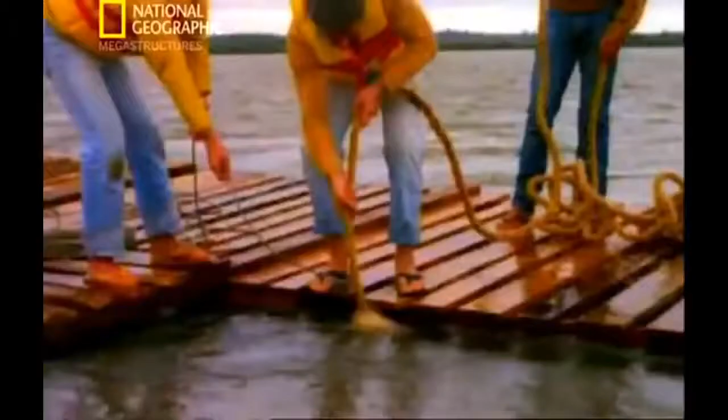The River Parana is the 7th largest in the world, holding 4 times as much water as America's Colorado River. At a spot called Itaipu, it flows through a deep underwater gorge. Geological surveys revealed that the bedrock was strong enough to bear the dam's enormous weight. Itaipu seemed perfect, but there was a huge obstacle.

The gorge sits right on the border between Brazil and its old enemy, Paraguay. In the 19th century, the two countries had fought in a bitter war. Paraguay lost half its territory and half its population was killed. Even over 100 years later, there was still mistrust between the two peoples.

1966, complex negotiations began between the two countries. For 7 years, the dam project hung in the balance. But in the end, the lure of vast supplies of energy proved irresistible. On the 26th of April 1973, Brazil and Paraguay signed a treaty. The Itaipu Dam got the green light.

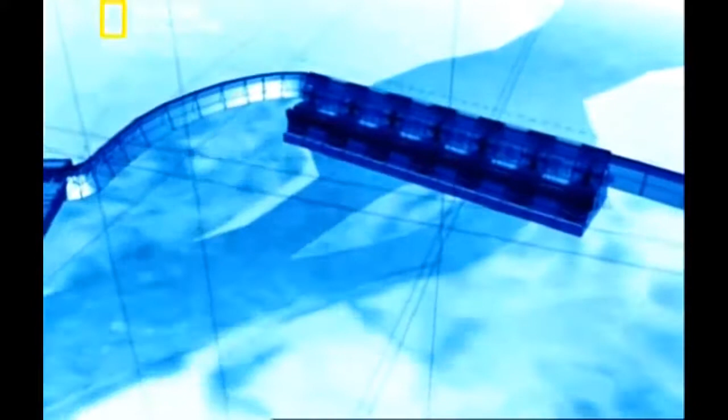Itaipu looked set to outstrip some of the world's greatest dam projects. It was destined to be 18 times as long as the mighty Hoover Dam, and 9 times as heavy. Most importantly, it would produce 6 times more electricity. But building the world's most powerful hydro dam meant making sacrifices. A vast area of farmland and forest would need to be flooded to feed the monster dam. Tens of thousands of people stood to lose their homes, and the habitats of thousands of animal species would disappear forever, as the Itaipu project reached the point of no return.

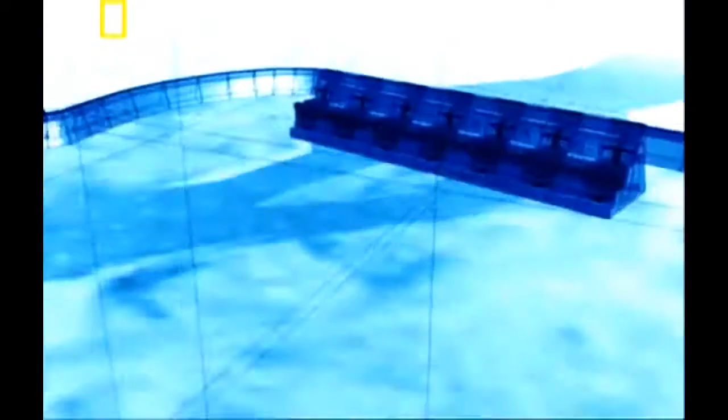May 1975. Old enemies Brazil and Paraguay signed an historic pact, which enabled construction to begin on the biggest hydro dam in the world. The aim, to harness the power of the mighty Parana River. The goal, an energy bonanza for both countries. The multi-billion-pound budget was jointly funded by the Brazilian government and by foreign investors.

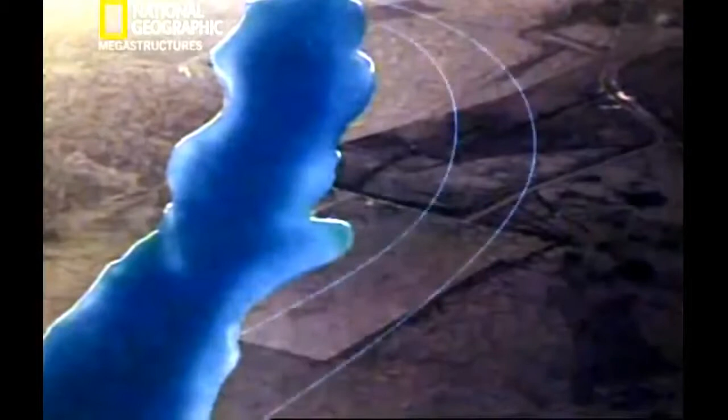Engineers found a site on the river that seemed perfect for the dam. But to build it, they would first need to divert the Parana from the course it had flowed for thousands of years and reroute it. A massive diversion channel had to be carved through the rock of the riverbank to temporarily divert the river away from the dam construction site. At 2 kilometers long and 80 meters deep, it was the biggest diversion channel ever attempted. If it failed to divert the river correctly, the whole project would be doomed.

Piero Sambinelli was the engineer in charge of building the channel. It was a mighty struggle that we fought. The Paraná was the most difficult diversion ever tried.

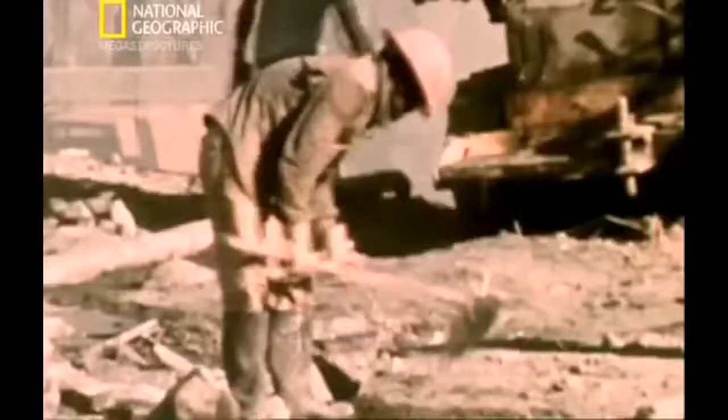Second of May, 1975. Building the Itaipu Dam began. First job, to dig the channel diverting the river. It took 3 years of explosives, mechanical diggers, and sheer brute force to slice through the rock. The dig threw up a mounting pile of waste rock known as spoil. As the months passed, the unwanted earth and rock reached the size of Rio's famous Sugarloaf Mountain.

Meanwhile, others were counting the environmental cost of such a big dam. Once complete, the Itaipu Dam would turn the Parana River Valley into a giant reservoir, flooding an area twice the size of the American city of Chicago to a depth of 100 meters.

One reason this valley has been chosen was because of its sparse population. But there was still 600 square kilometers of agricultural land and thousands of small farms on the Brazilian side, and on the Paraguayan bank, 470 square kilometers of rainforest, home to thousands of wild animal species. The thirst for energy comes at a price.

As the dig got underway, environmental consultants were drafted in, their task to assess the wild animals and plants saved from the coming flood. It was the first dam project to attempt a major rescue plan, but at this stage there were only 17 people involved, mostly volunteers. Brazilian Fernão Carbonar was one of the team.

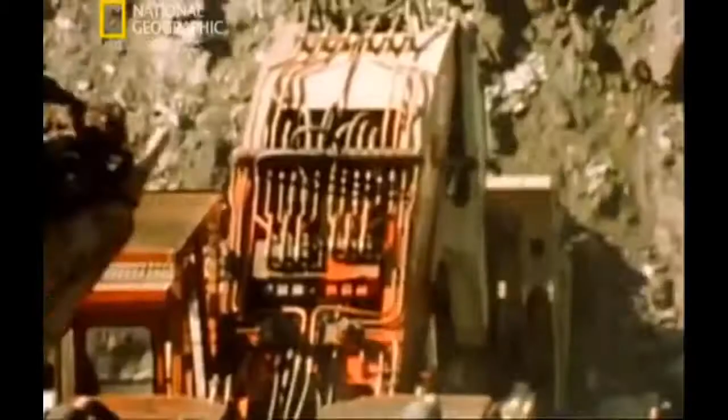Alberto Fres valued hundreds of homes. The houses were measured, described, and photographed one by one. And all belongings, even if it was just a stool, it was photographed. While the valuation process was seeming to take forever, the digging of the diversion channel was right on schedule.

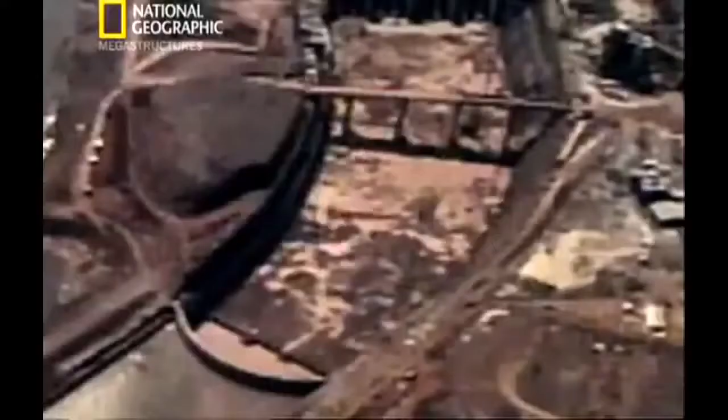3 years after digging began, engineers were now set to demolish the channel's concrete seals and send the Great Parana River pouring down the channel. 8 a.m. on October the 20th, 1978. Dynamite charges are set at each end of the channel. It's a tense moment. If the explosion damages the channel, it could set the project back years.

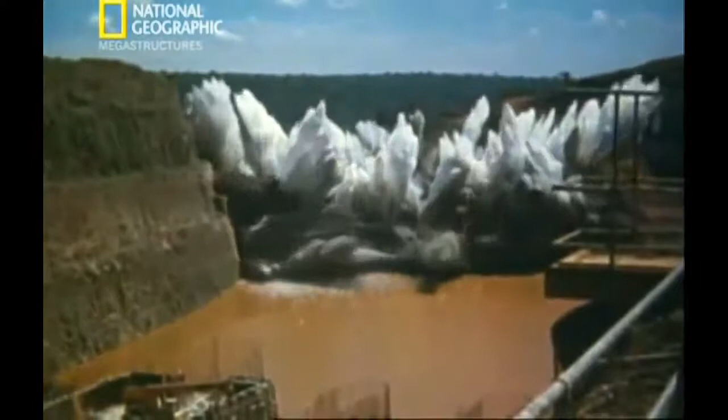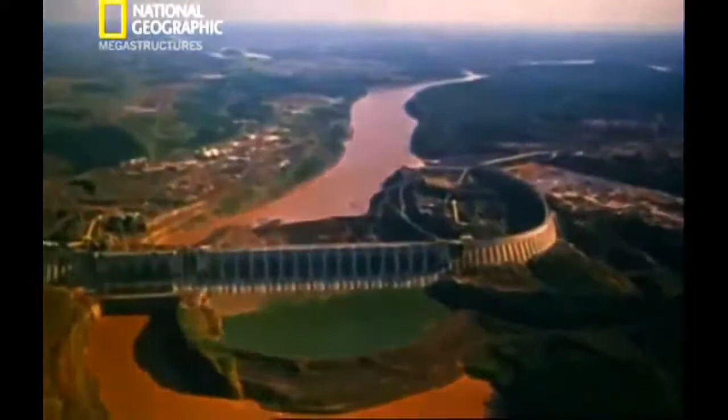It was a fantastic moment, incredible moment. The blast was like a firework. The mighty Parana is thundering down its new course. It's a momentous achievement. The Itaipu engineers have altered the path of one of South America's biggest rivers. But this was only phase 1 of the diversion. Some water still flowed down the old riverbed.

So huge temporary dams called cofferdams were built to force all the water down the diversion channel, away from the dam construction site. They were made by dumping huge pieces of rock into the river until the flow was stopped. The cofferdams might only be temporary, but British engineer Bill Beath knows how secure they had to be. Cofferdams prevent the river from flowing into the area where the dam is being built. Should these collapse during construction, it would be a total disaster.

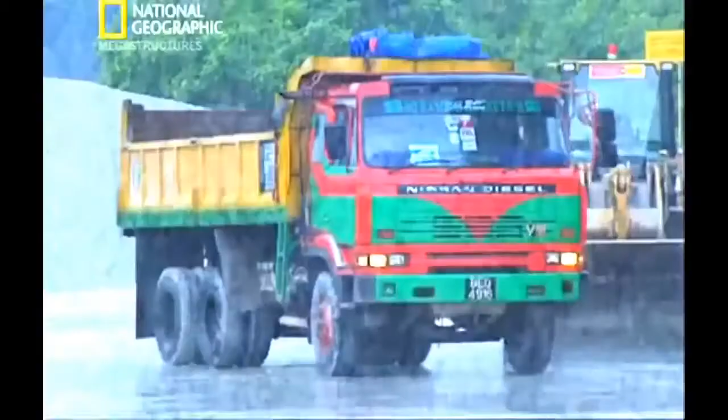Brazil has some of the most torrential rainfall in the world, and rising water could put the cofferdams under pressure or even burst the walls. That would bring a devastating wall of water down on hundreds of workers. The engineers hoped that they would have enough warning of rising river levels to safely evacuate workers. Until the main dam walls were built, all that stood between the workers and the threat of flood was a wall of rubble.

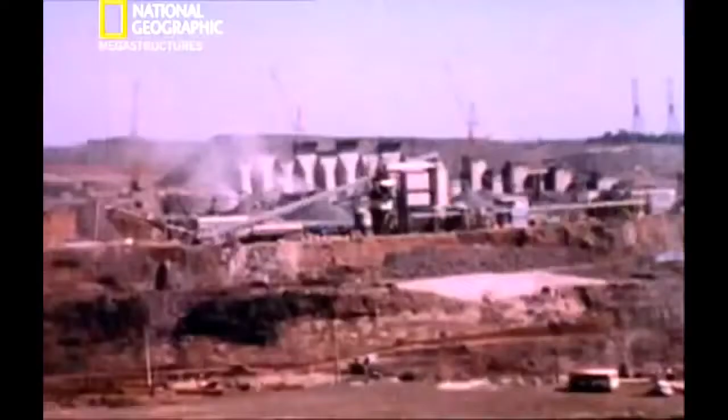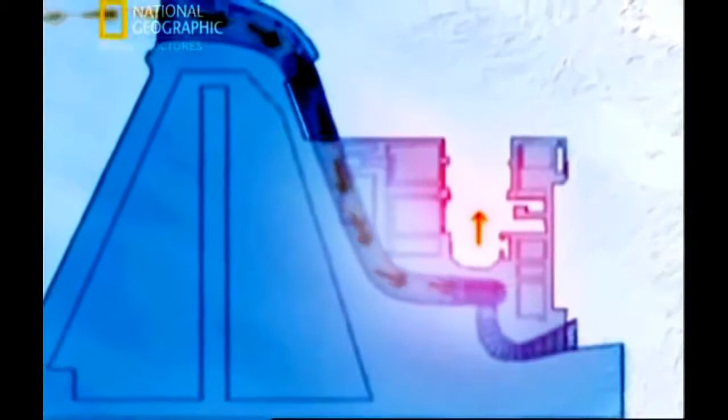With the River Parana now fully diverted, the biggest job of all, building the huge walls of the Itaipu Dam, finally began. But there was a problem. A hydroelectric dam works by dropping water onto turbines, making them turn at great speed to create electricity. The taller the dam, the greater the drop, and the more power is produced. Itaipu's engineers knew that the water in the dam must fall a full 100 meters to produce the promised record-breaking amounts of power. Yet, the riverbed is only 50 meters deep.

The solution? Build a series of secondary dams. These raised the height of the concrete central dam to make it tall enough to do the job. But it meant running the dam structure right across the valley for 7 kilometers. Autumn 1975. Work began on the secondary dams.

Meanwhile, the valuation of the houses, farms and land in the river valley which the dam will flood has also been completed. Brazilian and Paraguayan authorities have learned that before they submerge the area under 100 meters of water, they must buy up 8,500 homes and farms. The cost? £250 million in today's money. That's on top of the multi-billion-pound price tag for the dam itself. Offers of compensation were rushed out. Most were accepted, but a handful of people did mount legal challenges.

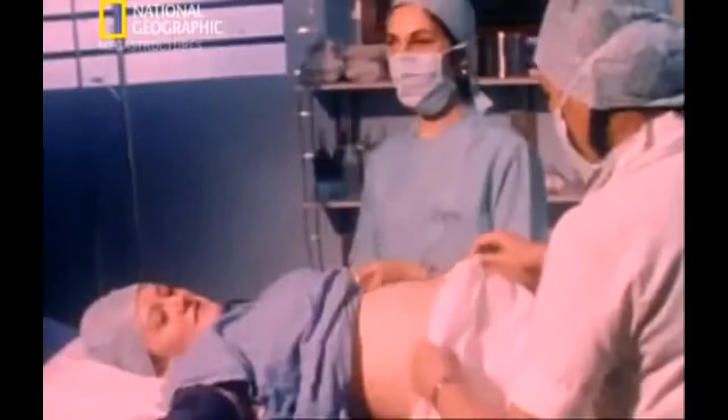Project managers had to choreograph a massive migration of workers into the area. They bussed in tens of thousands of workers from all over Brazil. Everything a large town needs, from schools and hospitals to churches and kindergartens, had to be built. New housing estates were built just for dam workers. Massive catering production lines were set up to feed the ever-increasing number of workers.

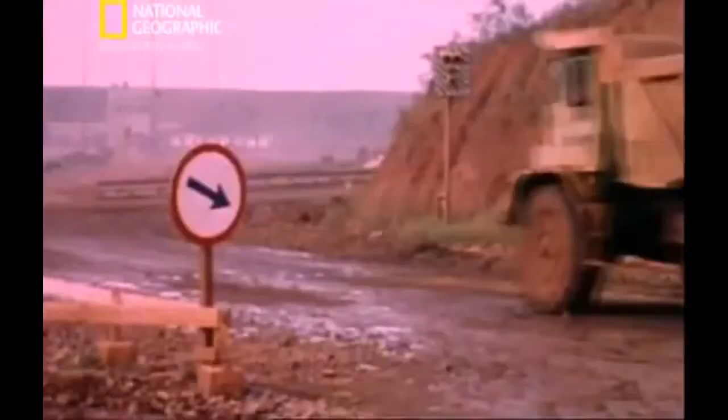The town of Foz do Iguaçu began growing at an incredible rate. We're really talking about moving into a one-horse town with something like 30,000 workers. What was once a tiny backwater became a gold rush town, practically overnight. While the new gangs of workers tackled the secondary dams, the engineers were wrestling with the design for the vast main dam that must block the river at its deepest point.

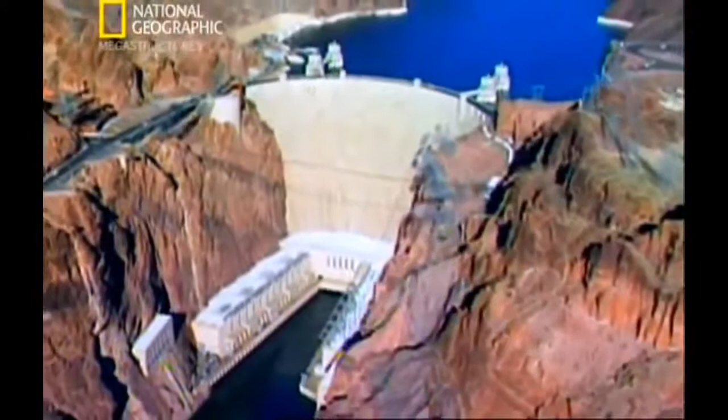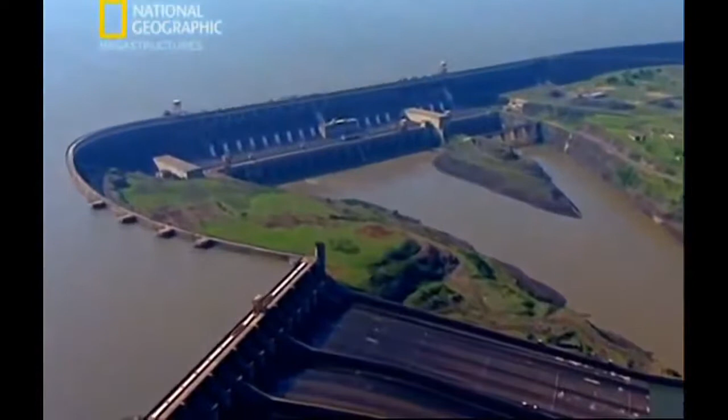All dams must be capable of one thing. They must resist the unimaginably vast pressure of the water in the reservoir behind them. Where geography allows, dams can be simple walls anchored to the surrounding rock. But Itaipu has no such help from the terrain. It must stand alone. So Itaipu followed a design that relied solely on its own weight. Engineers called this a gravity dam. The idea was to make the structure so heavy the water simply couldn't move it. To work, the dam had to weigh 61 million tons.

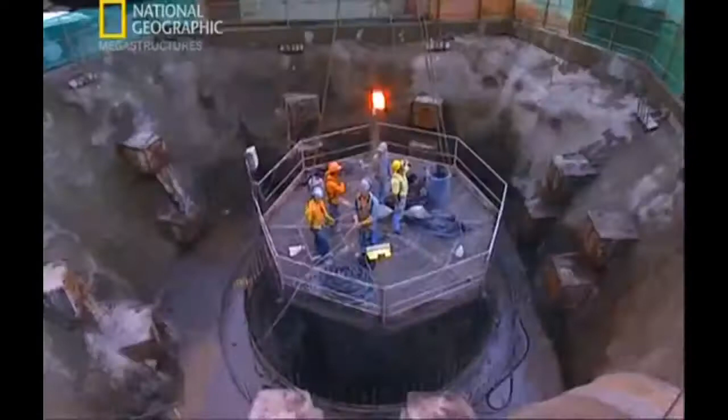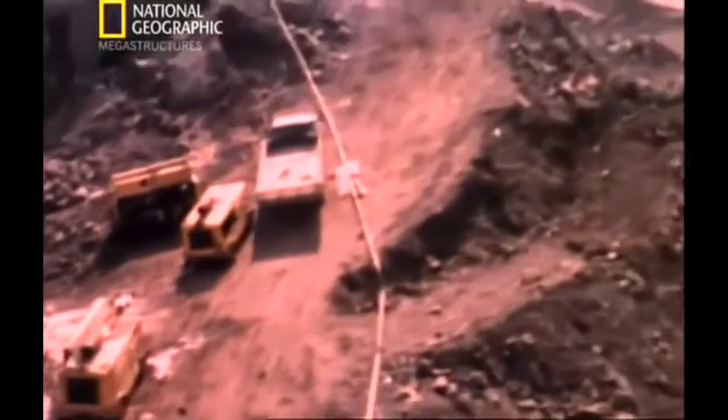But a dam is only as good as its foundation. The bedrock must be incredibly strong. Any weaknesses could cause the dam to collapse, an unthinkable disaster. The engineers undertook a detailed survey. The results were good. The dam's foundations were sound. And the engineers also had a money-saving trick up their sleeve. A dam made out of solid concrete would weigh more than it needs to and add huge costs.

So they planned instead to make the main dam walls hollow. As long as it has enough weight, it will resist the water pressure. That does not mean that it has to be absolutely solid. It can be hollow and still resist the water pressure. Building the dam hollow meant its base could be made even wider with the same amount of concrete, and the walls would slope more gently, pushing the water pressure down to the base where the dam is strongest. It also meant the power-generating equipment could be housed inside the dam itself. It was a clever solution.

Meanwhile, the environmental team completed their survey of wildlife in the area to be flooded. They found 129 species of birds, 32 species of mammal, and 9 species of reptile. Now they needed to work out how many animals they could trap and remove, and where they could be safely relocated.

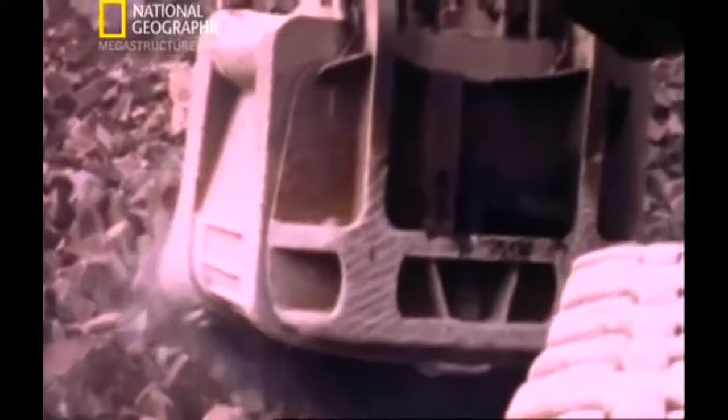June 1979. Preparation for the main dam was well underway. The managers were determined to stay on schedule. Everything was going smoothly. But then the work came to an abrupt standstill. There was a problem with the bedrock. As we dug into the foundations, we discovered, in fact, that the conditions weren't exactly what we had expected.

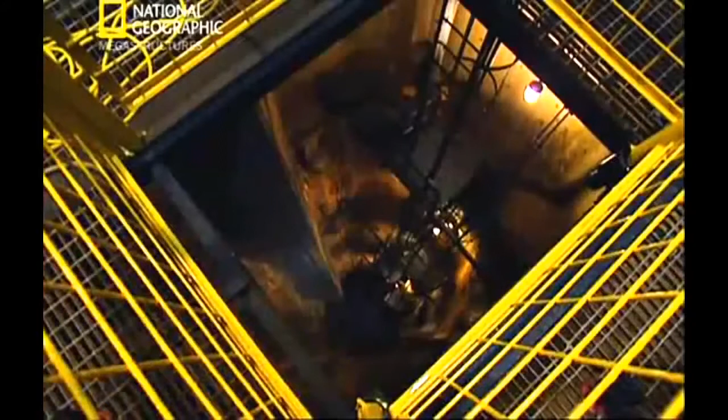It was disastrous news. The survey gave the bedrock a clean bill of health, but now engineers had come across a weak layer of crumbling rock, like a rotten tooth 20 meters down. The engineers feared that it wouldn't support the weight of the dam. If they carried on building, the dam would collapse. Tunnels were dug down through the rock so that engineers could investigate the suspect layer. Only a thorough underground inspection would reveal the scale of the problem. They prayed it was just one bad pocket of rock.

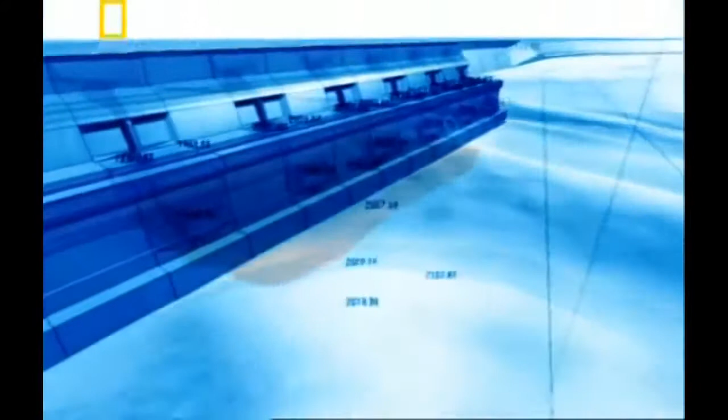Engineer Corrado Piasentin probed the secrets of the bedrock. This is the good rock, and this is the jointed weak rock. As you can see, it's very soft and not good for a foundation. The crumbling rock stretched right through the dam's planned foundations. Building a 61 million ton dam on top of this would have been criminally irresponsible. Workers stood idle while engineers and geologists wrestled with the problem.

Finally, they hatched a plan that might just work. They couldn't build on the crumbling rock layer, but could they replace it? Like demonic dentists, the engineers drilled out the decaying rock and gave it a massive filling with extra strong concrete. It did the trick, but the extra work took months and added a further £10 million to the budget. Fixing the crumbling rock layer threatened to delay the whole dam building schedule. And the relentless heat of the Brazilian sun was about to give the engineers another headache.

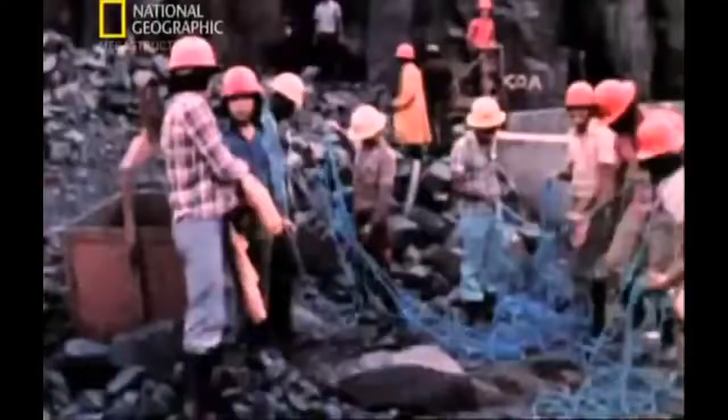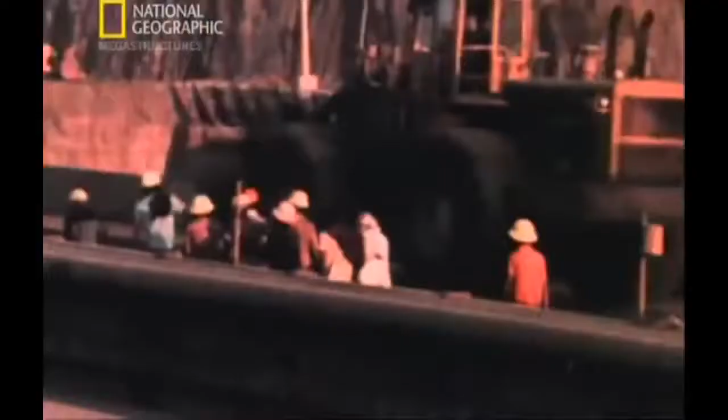May 1982. The 40,000 workers building the Itaipu Dam in the heart of South America have grappled with a potentially catastrophic problem. Fractured bedrock beneath the foundations threatened the massively heavy structure with collapse. At stake, the supply of energy to Brazil's future generations. Engineers came up with a solution. It seemed to be working.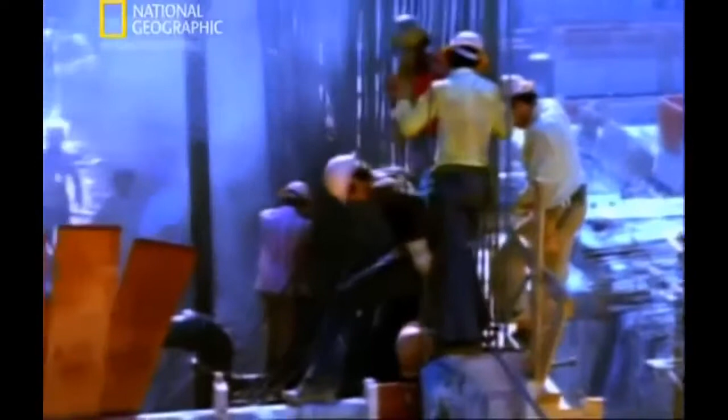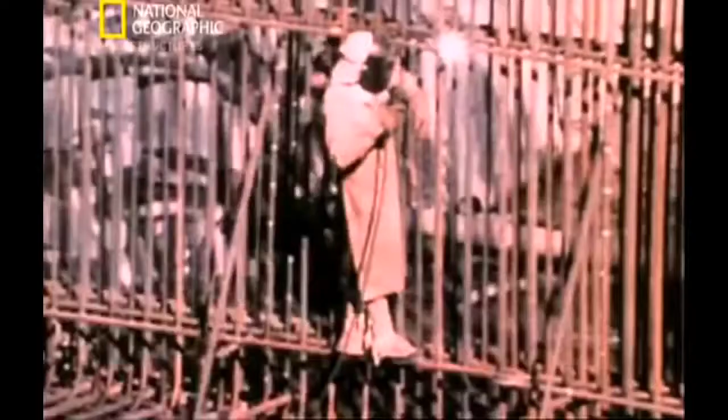Like a bad tooth, the rotten rock layer beneath the Itaipu Dam site was drilled and filled with extra strong concrete, so that it could take the weight of the dam. At the same time, work on the dam's giant central walls continued. The construction team set about casting 18 massive concrete blocks. Each block had to be made separately. Huge steel structures were erected to receive the concrete and hold it in place until set.

But it wasn't just the scale of the job that posed a challenge for the engineers. If they poured this amount of concrete the usual way, it just wouldn't set properly. When concrete sets, the cement reacts with water, creating heat. In smaller concrete blocks, the core temperature cools and sets relatively quickly. But in large blocks, the core temperature stays high longer. And as the surface cools and sets at a faster rate than the core, hundreds of cracks can appear, fatally weakening the concrete.

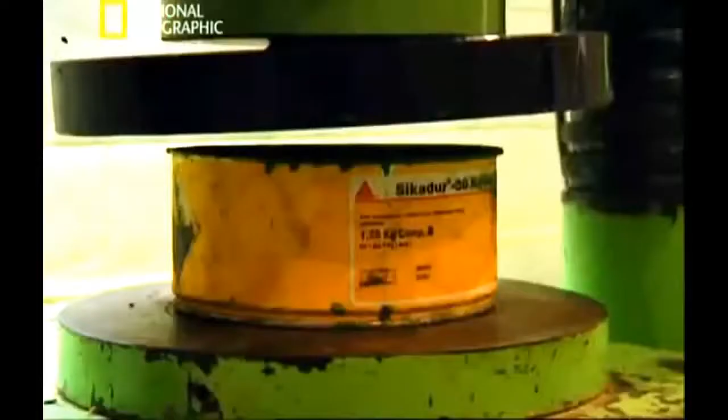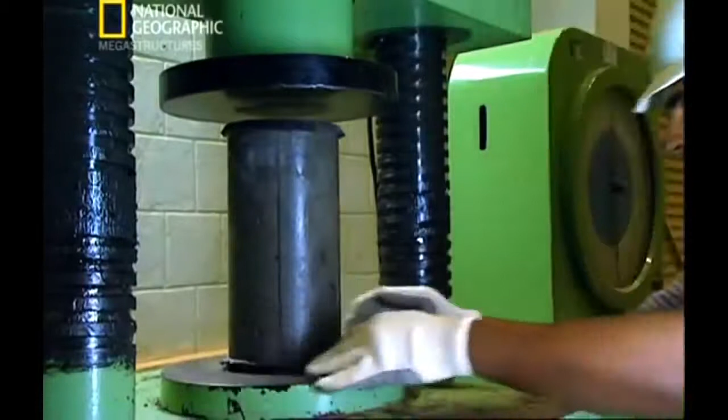And that wasn't the only problem. Temperatures in Brazil can easily soar past 40 degrees centigrade. If the huge blocks were allowed to set in the sun, they could reach more than 90 degrees. This too would cause weak spots and cracks. Engineers conducted test after test on concrete set in these conditions to see how it reacted to extreme pressure. Even good concrete has a breaking point. Concrete dried by the sun would be much weaker. A solution had to be found.

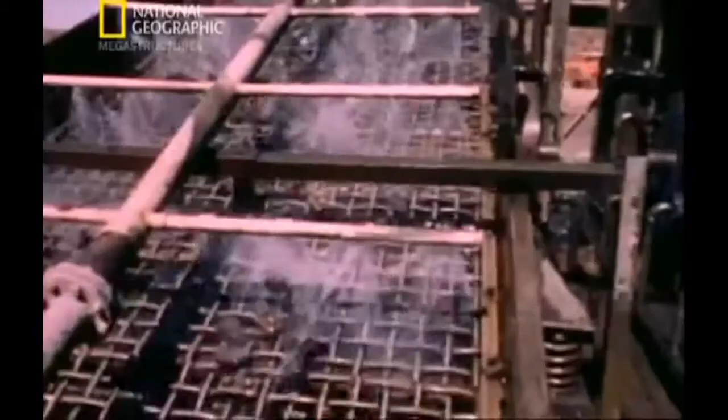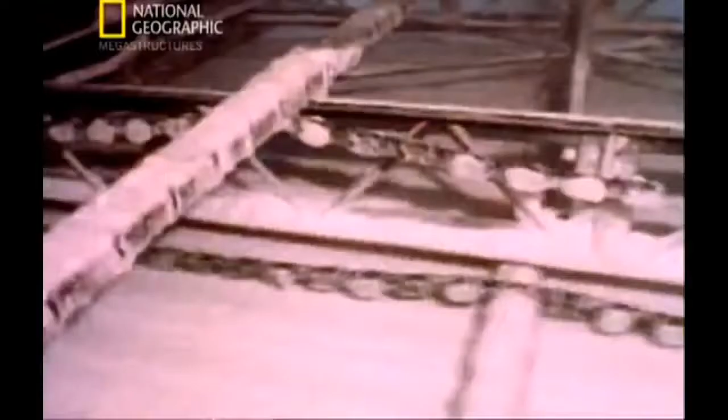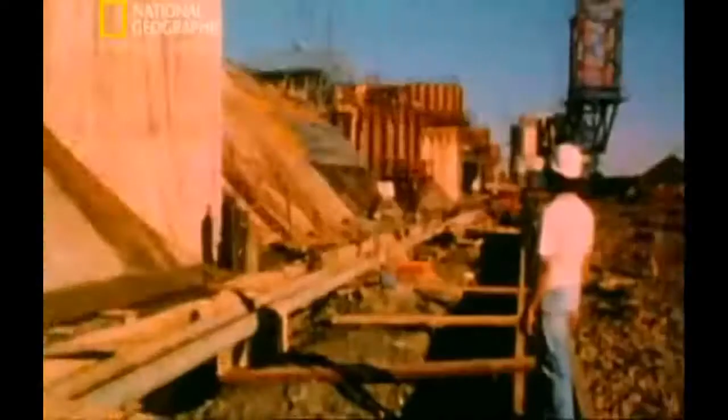After wrestling with the concrete problem, engineers finally came up with the answer: refrigeration on an unprecedented scale. 2 huge cooling plants were used to chill every gram of concrete. Engineer Adalberto Chanu recalls the scene. The stone was washed with icy water and blasted with cold air. Using a large number of ice chips, we were able to produce concrete with a mean temperature of just 4 degrees. And because we had an efficient transportation system, the concrete only reached 7 degrees by the time we were pouring it into the molds. The scale of the refrigeration job was vast. The 2 plants had the cooling capacity of over 50,000 domestic freezers.

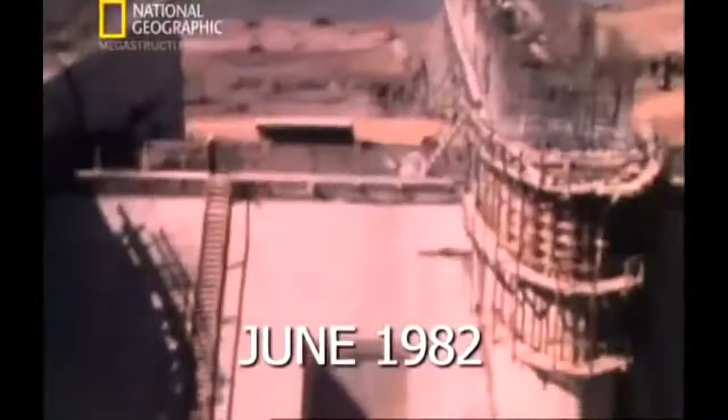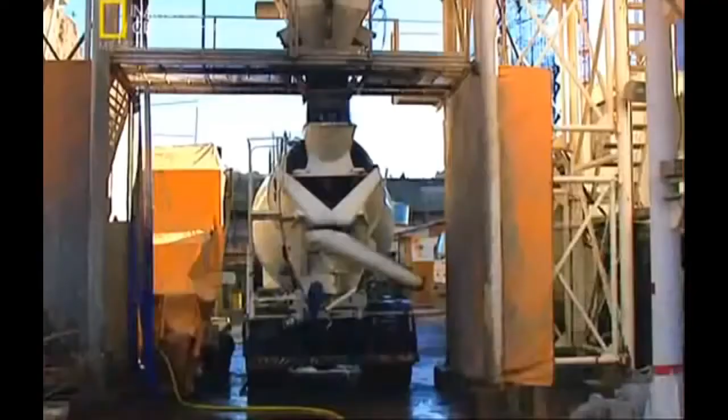By June 1982, the race was on to meet the dam's completion date, just 3 months away. Overhead cableways were now feeding the dam's insatiable hunger for concrete in a continual round of supply and demand. This cement was being trucked in over thousands of kilometers. At one time, something like about 1 40-ton truck every 20 minutes in cement. 40,000 people were working at a rate equivalent to raising a 20-story building every 55 minutes. As the project neared 0 hour, the pace became increasingly fierce.

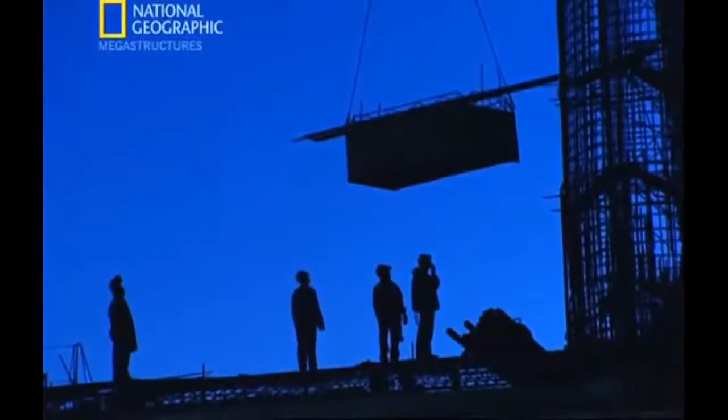Adalberto Chanu ran the work schedule. During construction, we had really tight deadlines. We worked in 2 shifts of 12 hours for almost 360 days a year. The work went on around the clock. Right through the night, men and machines moved about the huge construction site in a finely tuned ballet.

As the countdown to the dam's completion and the valley flooding began, conservationists went into action. They hoped to save 30,000 animals, relocating them to new areas or to wildlife sanctuaries. The rescue team knew that it was a race against time to save as many animals as possible before the flood. At the same time, the massive task of relocating over 8,500 families got underway. Compensation claims were settled in lengthy negotiations and court cases. Some were given money, others were given a similar property and land elsewhere. Some of these families had lived and farmed in the Parana Valley for generations. For many, it was a devastating moment as they left their homes forever.

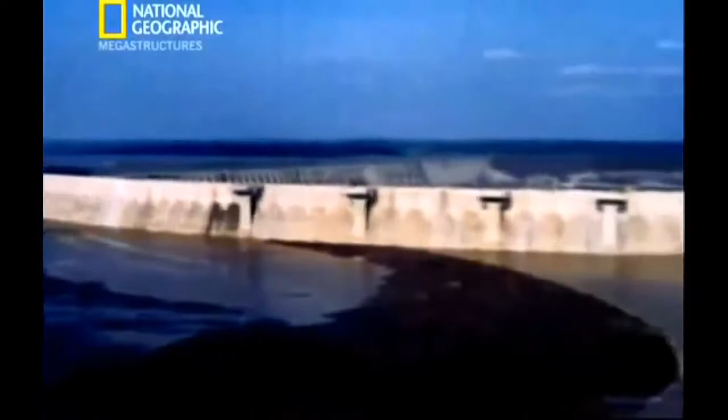The countdown continued. The 7-kilometer string of dams was now complete. Itaipu was about to take its place as one of the longest and most impressive dam structures in the world. But the next step was absolutely critical. Engineers have to close off the channel that diverts the Parana River. The river will then slowly flood the entire valley, creating the vast reservoir that will feed the dam and drive its power-generating turbines. Once filled, the water pressure in the Itaipu Dam's reservoir will be like 4,000 bulldozers pushing ceaselessly against the dam walls.

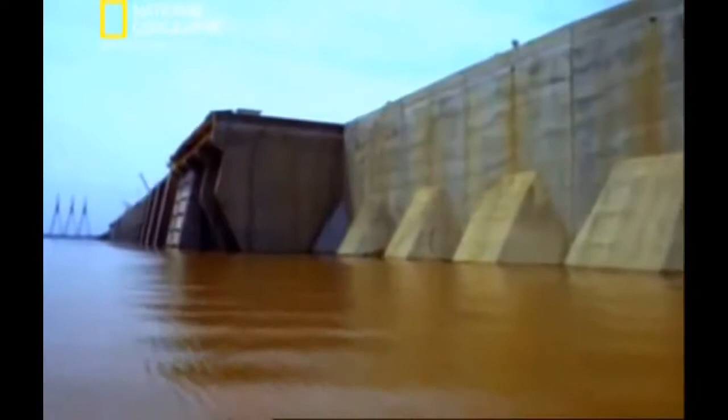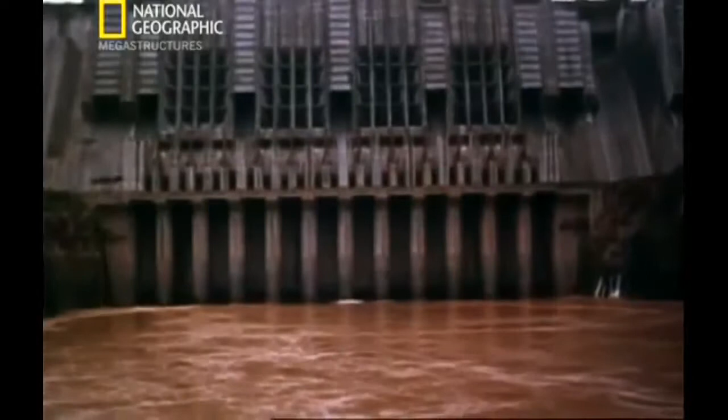The engineers had made highly detailed calculations and were confident that the massive walls were more than strong enough to hold back the water. But the filling of any dam reservoir is a critical moment. The concrete dam walls are all that stand between the vast reservoir and the people of Foz do Iguaçu. What if the dam were to fail? The failure of any major dam is always a major disaster, because the amounts of water that would be freed would create a wave that would flow down the river and create tremendous damage.

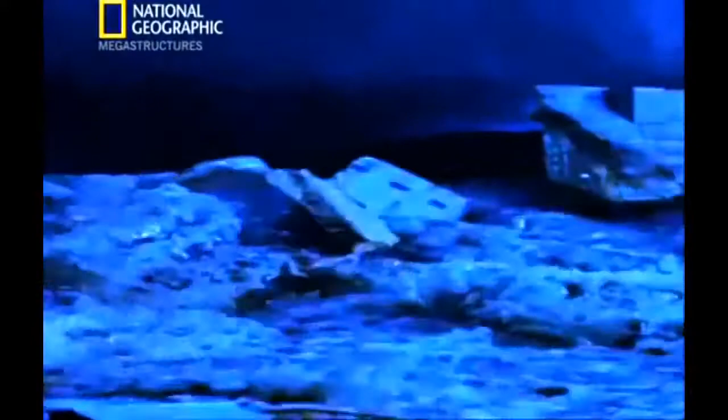If the walls of Itaipu were to fail, the escaping wave of water would dwarf all but the most extreme flash floods Brazil has ever seen. A city-sized body of water would charge down the Parana Valley. The wave could reach 50 kilometers an hour and demolish all in its path but the most substantial buildings. The death toll would depend on whether people living in the valley had any warning of the impending flood.

June the 3rd, 1976. The Teton Dam in Idaho, USA, was being filled for the first time. Engineers spotted a crack in the walls and tried to repair it. They failed. 2 days later, the western third of the dam simply disintegrated. $1 billion in damage to property. Miraculously, only 14 people died. But the incident was a timely reminder of the dangers of dam construction.

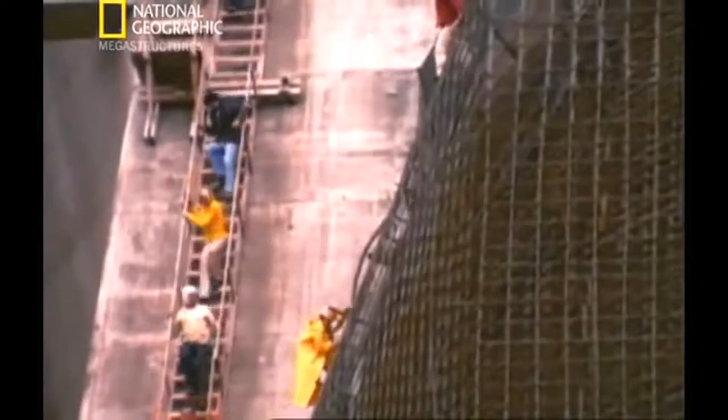October 1982. 7 years since building began, the big day had arrived. The massive sluice gates in the diversion channel were closed. The River Parana flowed once again down its original course. It poured over the cofferdams. It charged into the reservoir. Whatever happened, there was no way to stop the water now.

As the water rose, more and more pressure was put on the huge concrete walls. The reservoir took 14 days to fill to its final depth of 100 meters. Everyone had been evacuated from the flood area, but some stayed to watch their homes disappear under the rising water. And an army of over 300 conservationists from Brazil and Paraguay set out on one last mission to save as many animals as possible from drowning.

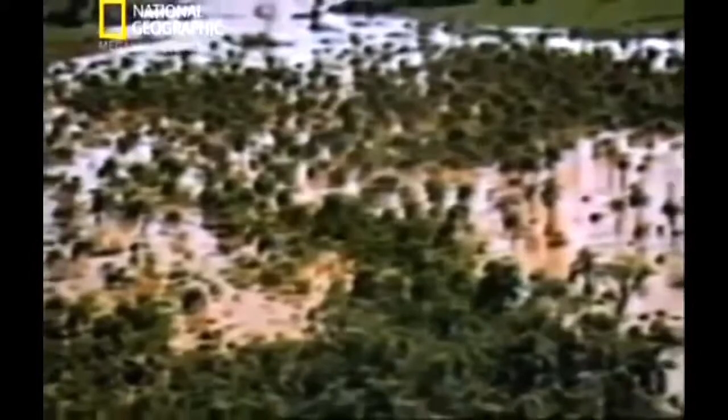As the water levels slowly rose, small islands of high land were left behind. They're only temporary, and after a few hours they would disappear forever beneath the surface. For now, they provided a last desperate refuge for terrified animals. Like modern-day Noahs in tiny arks, Fernão Carbonar and his rescue team tried to save as many as they could before it was too late. We used some nets, we used some hooks for the snakes, and some of them we just caught them by the tails.

Soon the animals had only treetops to cling to above the rising water. And there were hazards for the rescue team too. The water was high, so you can imagine yourself going by boat on a treetop. You didn't really know what to expect to find between the leaves. Sometimes you just look to your right, and about 20, 30 centimeters you had a rattlesnake or some other kind of poisonous animal. But apart from the odd scratch and bite, the rescuers managed to avoid serious injury.

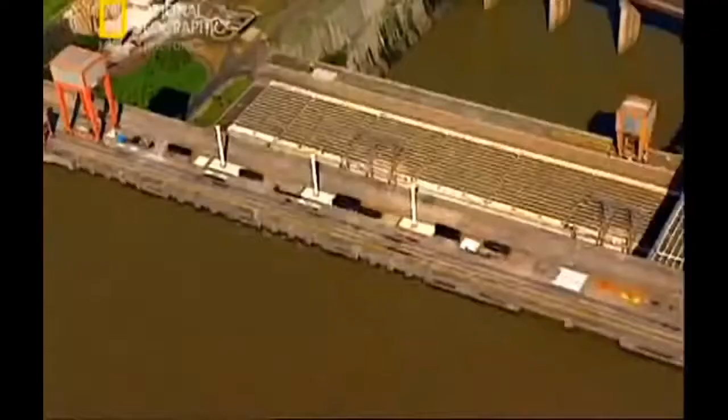For days, the rescue progressed and the floodwaters continued to rise. Within 2 weeks, a vast stretch of the Parana Valley was lost forever. Itaipu's reservoir now stretched as far as the eye could see. The dam's giant walls were holding back the water, but the engineers now had to stop it rising any further. If the water flowed over the top of the dam, the walls could be weakened and even start to crack, with potentially catastrophic consequences.

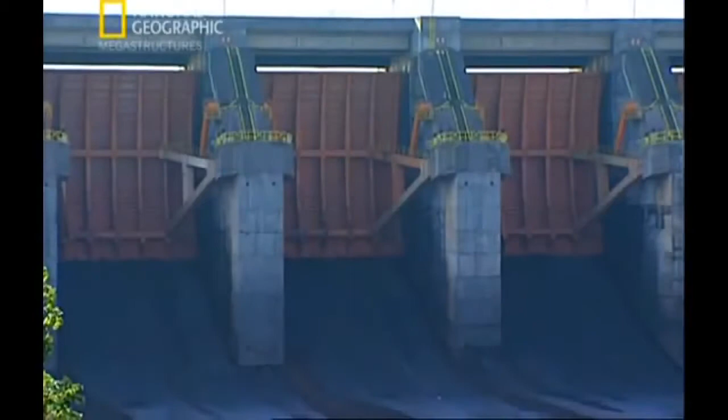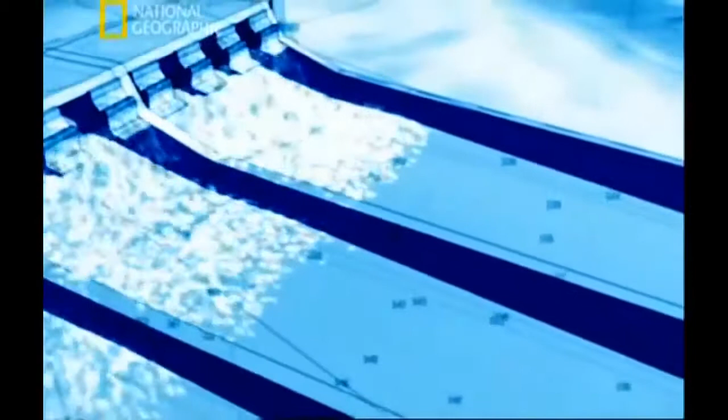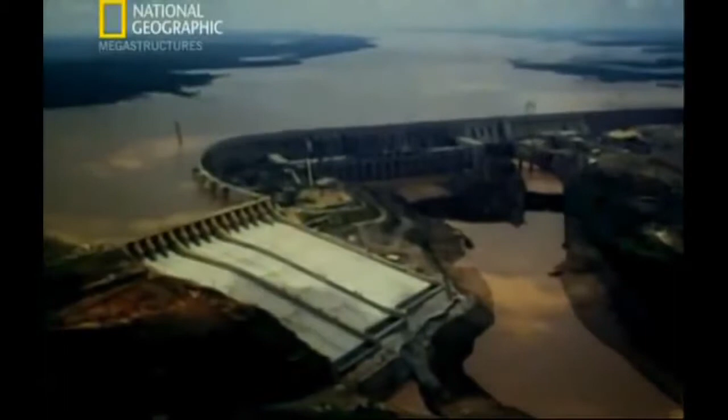Engineers had a trick up their sleeve. A crucial escape chute called a spillway had been built at the edge of the dam. It's like a giant version of the overflow of your bathtub. When the water gets too high, it drains away, without causing a flood. The big difference is, this overflow must cope with 64 million litres of water per second. If it's been wrongly designed, the force of the water could damage it, setting the project back years. But there can be no rehearsals. The first time the spillway is used will be for real.

October 1982. Excited crowds and world media gather to watch the big event. Engineers prepare to lift the sluice gates and open the spillway for the first time. The water begins as a trickle. It soon becomes a raging torrent. It's working. The spillway is taking the strain. It's controlling a cascade of water 22 times bigger than Niagara Falls. Brazil is now home to the biggest man-made waterfall on the planet.

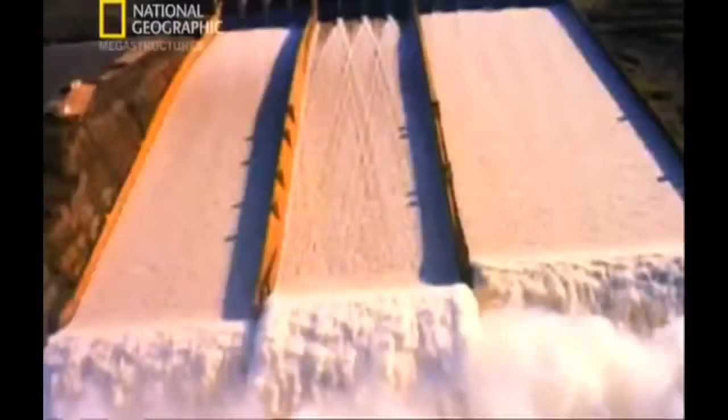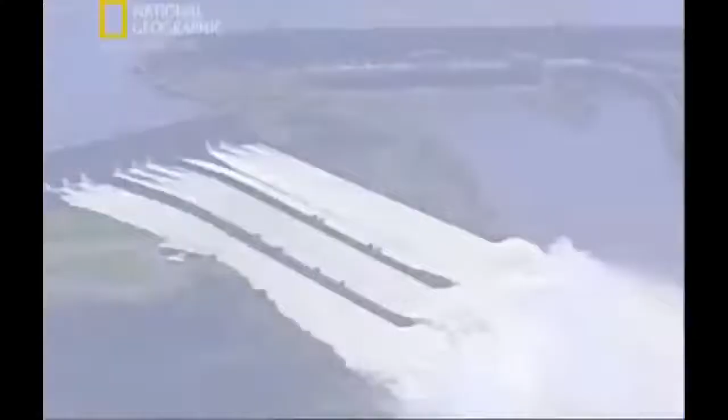Engineer Adalberto Chanu witnessed the moment. It was a really unforgettable spectacle, and it will remain engraved on my memory forever. The engineers were relieved and elated for the moment, but their spillway worries weren't over yet. They feared that the volume of water thundering off the spillway might in some way damage the dam itself.

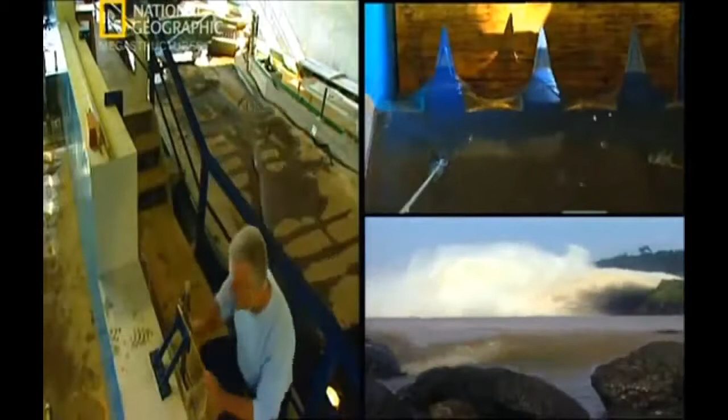At the Furnas lab in Rio de Janeiro, Roberto de Souza builds detailed high-tech models of dams to analyze the consequences of even the smallest miscalculation in spillway design. With this scale model of a dam spillway, we're carrying out an extremely detailed study of the effects of the water as it falls, of the energy that it can produce, energy that may damage the structure itself.

When water crashes off the end of the spillway, it lands below the dam with great force, churning up the river. This energy must be dissipated using an upward curve like a ski jump that forces the water up into the air, reducing its force. The energy dissipation is so important that you could say a good design of spillway can avoid damage to both the actual structure and the land downstream.

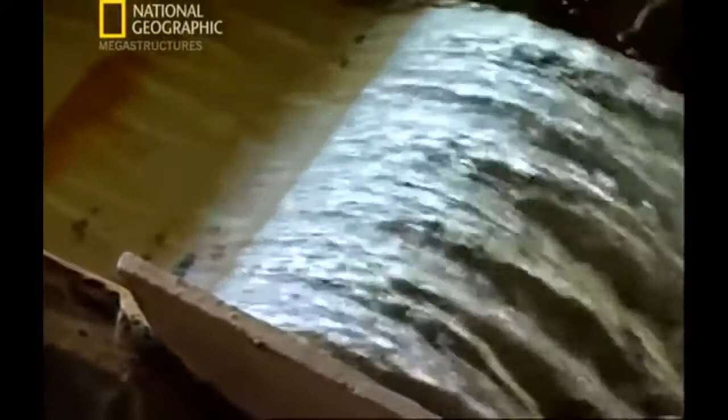Engineers relied on scale models to get the angle of the ski jump just right. If it's wrong, the water will turn back on itself and could seriously erode the riverbank. And if the process continued over years, it could eat away at the foundations of the dam. Itaipu's engineers have calculated that there will be some erosion, but not enough to do any serious damage. All they can do for now is keep checking the riverbank and hope. If they've got it wrong, the structure of the dam itself could be in peril.

The vast reservoir feeding the Itaipu Dam has been filled, flooding thousands of square kilometers of agricultural land and rainforest. 30,000 assorted birds, mammals and reptiles were saved from drowning by conservationists. But they all needed new homes. Some were relocated, but 300 rescued animals were found a new home in a wildlife sanctuary.

700 square kilometers of forest also disappeared in the valley flooding. To replace the lost trees, millions of new saplings were planted around the reservoir's edge. A conservation program like this looks basic by modern standards, but in the 80s it represented a trailblazing bid to minimize the damage caused by large-scale dams.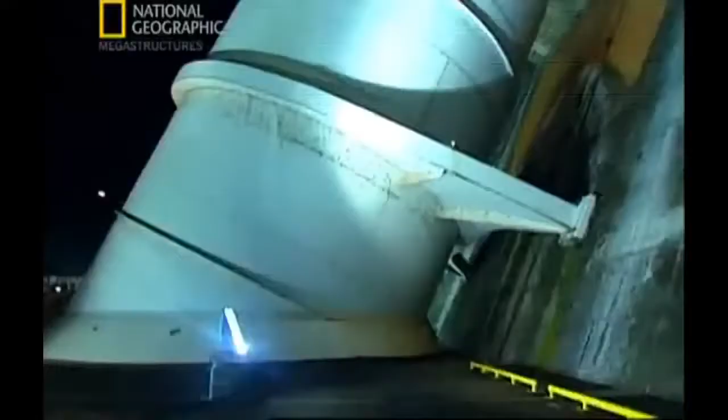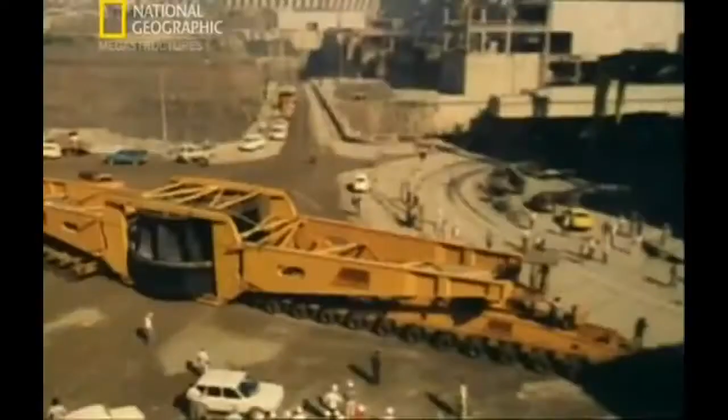Over the next 9 years, Itaipu's final frenetic stage unfolded. With the dam walls finished, work began on the power-generating plant. 18 giant tubes to funnel water to the turbines went up. The turbines themselves weigh 800 tons. They're so huge that special vehicles had to be built to transport them. And that wasn't all.

The bulk of the Itaipu Dam's electricity was destined for the huge cities of Sao Paulo and Rio de Janeiro, over 1,000 kilometers away. A massive network of pylons stretching right across the Brazilian countryside was erected. The electric power lines from the dam are long enough to stretch around the globe 1.5 times.

As the dam neared the moment of producing power, engineers nervously inspected the riverbank for signs of damage from water thundering down the spillway. This is the kind of erosion that huge volumes of water can do when traveling at high speed. How serious was the erosion caused by the spillway? It didn't look good. The engineers took precise measurements. They made further calculations. Was the erosion creeping ever closer to the dam's foundations?

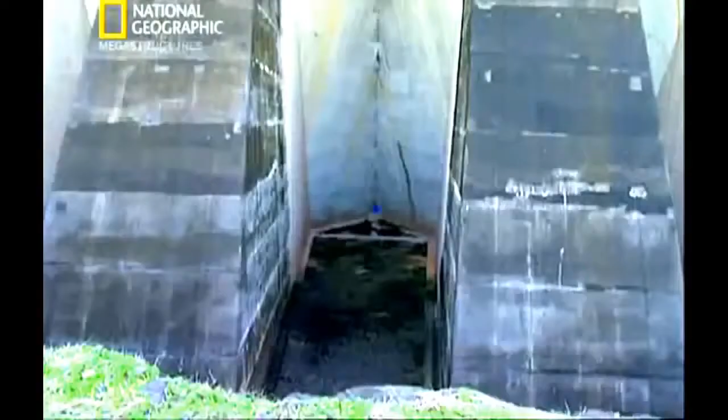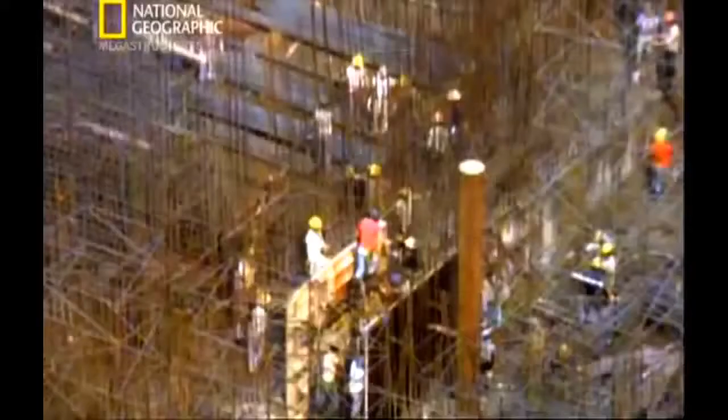To their great relief, the engineers found their original predictions were right: the erosion was not getting any worse. This shows how important it is to get the design of the spillway exactly right. The foundations of the dam were safe. Itaipu was now nearing completion. The pace had been unrelenting. But South America's biggest ever engineering project had come at great human cost. Records aren't precise, but 145 people are thought to have lost their lives in accidents while building Itaipu.

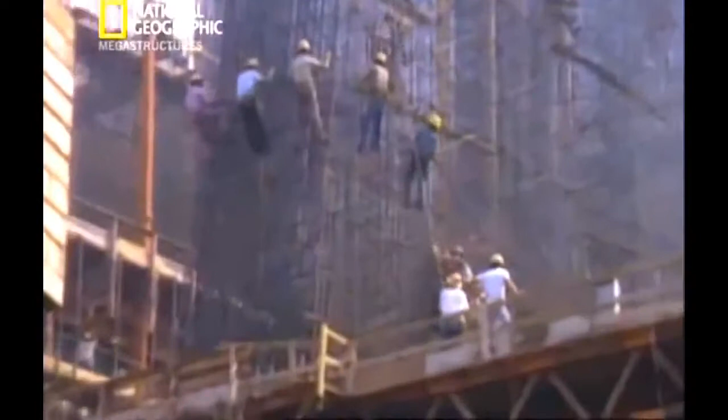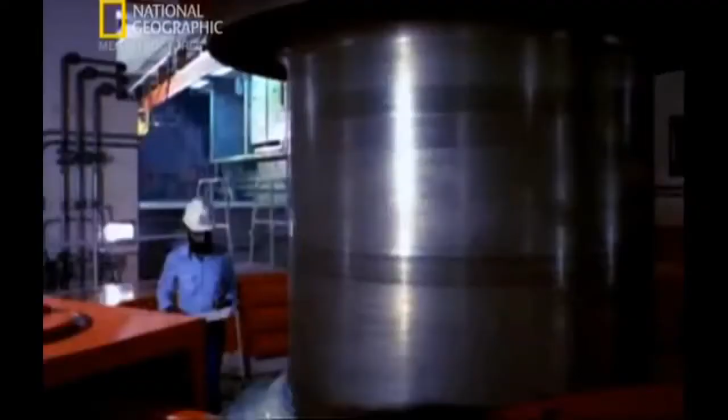May 1984, and Itaipu was about to fulfill its purpose and produce its first electricity. It was the moment everyone had been waiting for, the culmination of 9 years of grueling work. Water poured through the gates at the top of the dam, thundered down and turned the turbines. One by one, further turbines were brought online, and in April 1991, Itaipu became the most powerful hydroelectric plant on the planet. Itaipu was now feeding the energy demands of 24 million Brazilians in Rio de Janeiro and Sao Paulo. The electricity flowed without a hitch for 10 years.

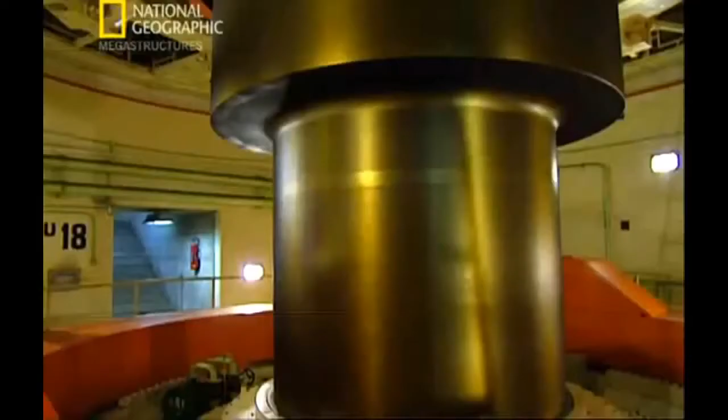Until January the 21st, 2002, 1:30 p.m. Without any warning, 13 of Itaipu's 18 giant turbines suddenly grind to a halt. Electricity production stops. The engineers at Itaipu are mystified. What has gone wrong? Rio and Sao Paulo are brought to a standstill. Traffic lights stop working, causing 30-mile backups. Subway systems close down. People are trapped in elevators. Offices, homes, factories are plunged into darkness. What is causing this cataclysmic power failure?

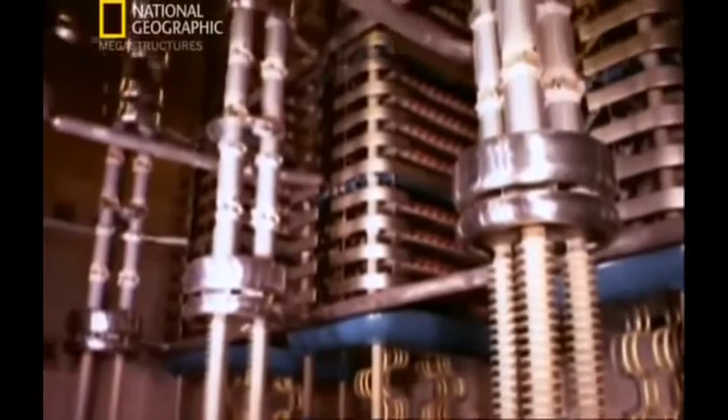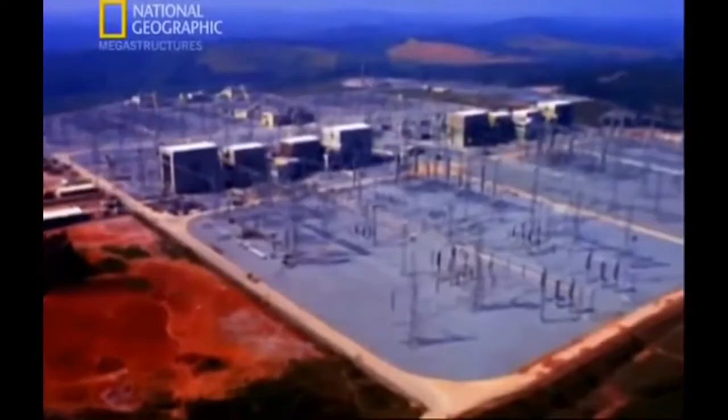José Ricardo de Silveira was in charge of power output. All the generators and all the transmission systems for Brazil suddenly cut out. At the time, we didn't know exactly what was going on. After frantic investigations, electricians finally tracked the problem down. A power line had collapsed. The transmission system couldn't cope with the power level that Itaipu was generating. It had tripped the switch that turns off the mighty dam's generating system. An inquiry followed. The result, £8 billion were poured into upgrading the transmission system to prevent future blackouts. In one afternoon, Brazil's urban population saw just how much they relied on Itaipu's electricity.

20 years on, the Itaipu Dam remains an extraordinary achievement and was recently voted one of the 7 wonders of the modern world by engineers. Today, a staggering 90% of Brazil's energy is generated by hydroelectric dams. Dams like this have helped Brazilian cities and industries to grow and brought electricity to people in remote areas of the country. But the heavy reliance on water power has come at a price.

And all around the world, there's a growing awareness of the environmental havoc that hydroelectric dams can cause. At Itaipu, dead treetops serve as a powerful reminder of a valley that has gone forever, and the enormous price Brazilians have paid in their quest for power.

Biggest hydro dam in the world. The aim, to harness the power of the mighty Parana River. The goal, an energy bonanza for both countries. The multi-billion-pound budget was jointly funded by the Brazilian government and by foreign investors. Engineers found a site on the river that seemed perfect for the dam. But to build it, they would first need to divert the Parana from the course it had flowed for thousands of years and reroute it.

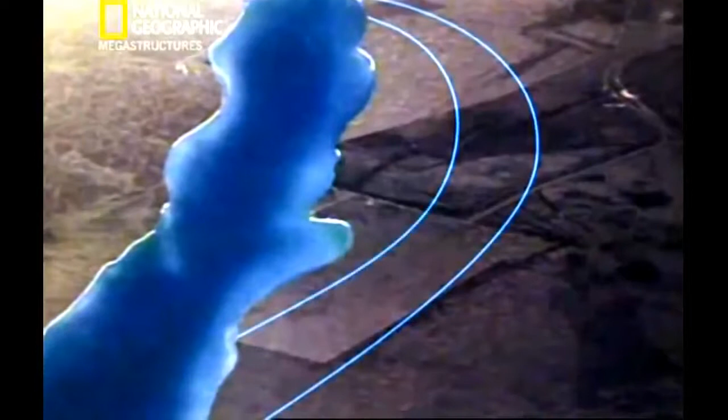A massive diversion channel had to be carved through the rock of the riverbank to temporarily divert the river away from the dam construction site. At 2 kilometers long and 80 meters deep, it was the biggest diversion channel ever attempted. If it failed to divert the river correctly, the whole project would be doomed.

Piero Sambinelli was the engineer in charge of building the channel. It was a mighty struggle that we fought. The Paraná was the most difficult diversion ever tried.

Finding the perfect site for such a big dam wasn't easy. The river had to hold a volume of water great enough to produce the energy needed. It must flow through narrow banks, and its bedrock had to be strong enough to take the massive weight of the dam walls. This was the obvious spot. The river Iguaçu feeds one of the biggest waterfalls in Brazil, but it only had 1/8 of the water needed for the monster dam. One by one, engineers checked out 50 other sites. None made the grade. Finally, the perfect location was found.

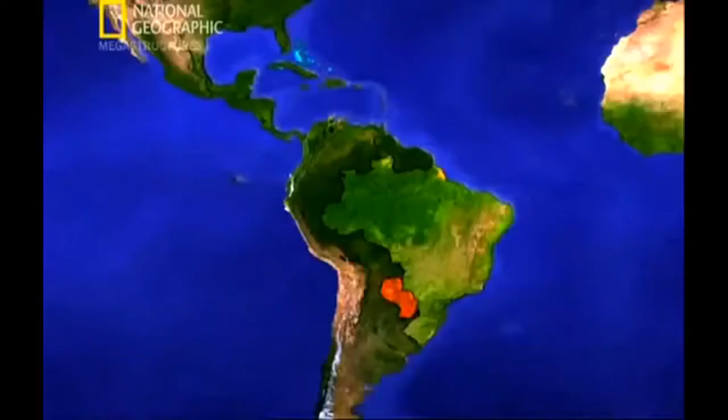The gorge sits right on the border between Brazil and its old enemy, Paraguay. In the 19th century, the two countries had fought in a bitter war. Paraguay lost half its territory and half its population was killed. Even over 100 years later, there was still mistrust between the two peoples.

In 1966, complex negotiations began between the two countries. For 7 years, the dam project hung in the balance. But in the end, the lure of vast supplies of energy proved irresistible. On the 26th of April 1973, Brazil and Paraguay...

Rewind to the 1960s, a boom time for Brazil. Its economy was growing by 10% a year, but the population was growing too. Already standing at over 70 million, forecasters predicted a rise to 170 million in just 3 decades, making Brazil one of the world's most populous countries. Brazil's growth created a spiraling demand for energy. The government had to find a way to satisfy the power-hungry masses of the future, or face economic crisis. But how?

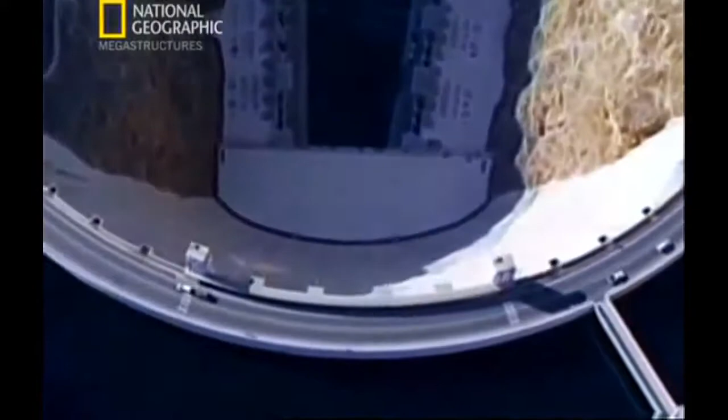But building the world's most powerful hydro dam meant making sacrifices. A vast area of farmland and forest would need to be flooded to feed the monster dam. Tens of thousands of people stood to lose their homes, and the habitats of thousands of animal species would disappear forever. As the Itaipu project reached the point of no return.

April 1973. Old enemies Brazil and Paraguay signed an historic pact, which enabled construction to begin on the...